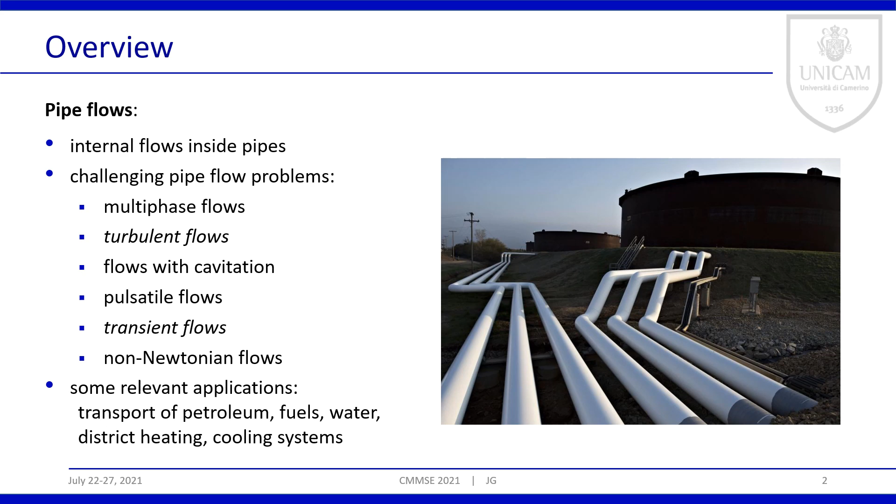And the importance of pipe flows is due to the fact that they are involved in some relevant real-life applications, for example, the transport of petroleum fuels, of district and drinking water, and district heating, or applications such as cooling systems.

The study of pipe flows in our group has started with an application in the geothermal energy field. In this field, I have also discussed my PhD thesis. In particular, geothermal energy is a renewable energy resource that is based on the exploitation of the heat stored in the earth by humankind. And the devices that allow this exploitation are called geothermal exchangers. Such devices consist of a pipe and a carrier fluid that circulates within the pipe. And these exchangers allow the heat transfer between the fluid in the device and the surrounding soil.

And the operating principle is that the temperature in the underground is constant all over the year. And such exchangers can be placed into the soil in different layouts, as you can see in the picture on the left. And also, such devices can have different geometries, and in the picture on the right you can see one possible configuration, which is the U-shaped pipe.

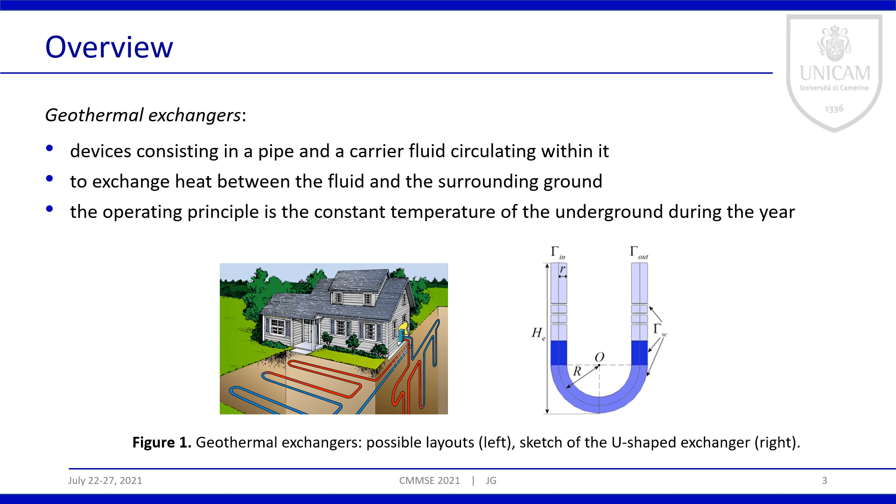Now we focus our interest on a pipe flow in a rectilinear pipe. Here we have the classical formulation of pipe flow problems in terms of fluid dynamics laws. In particular, the first equation is the momentum equation, also called the Navier-Stokes equation, and the second equation is the continuity equation.

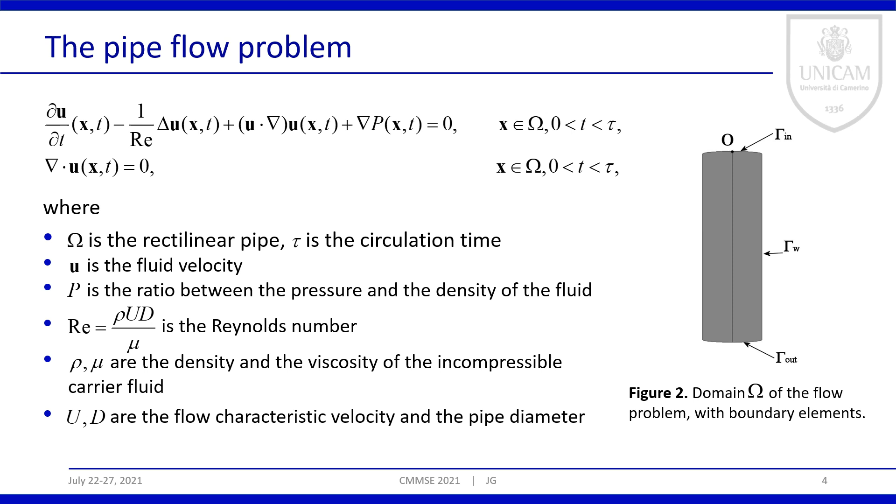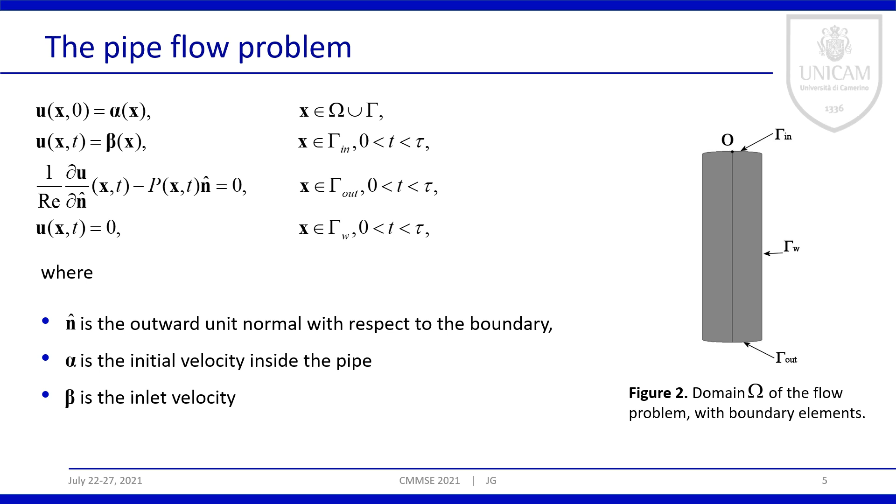Then, the previous equations are endowed with suitable boundary and initial conditions. In particular, the boundary conditions prescribe the velocity field at the boundary, and here the boundary has been denoted by gamma. So we have gamma in for the inlet, gamma out for the outlet, and gamma W for the wall of the pipe. On the other hand, the initial condition prescribes the velocity field at the initial time step.

Now we briefly analyze the approximation of the flow problem that we have defined. I will just show the fundamental steps. The approximation scheme is based on the Galerkin finite element method, so we suppose to discretize our domain omega by means of a tetrahedral mesh, whose nodes consist of the 4 vertices of each tetrahedron and the 6 middle points of its edges. So we define 2 bases of finite elements.

In particular, one basis is made of second-order polynomials that we denote with psi h, and the other basis is made of first-order polynomials that we denote with phi k. And we use the first basis psi h to represent the approximation u tilde of u, so the approximation of the velocity field, while we use the second basis, phi k, to represent the approximation p tilde of p, so the pressure field.

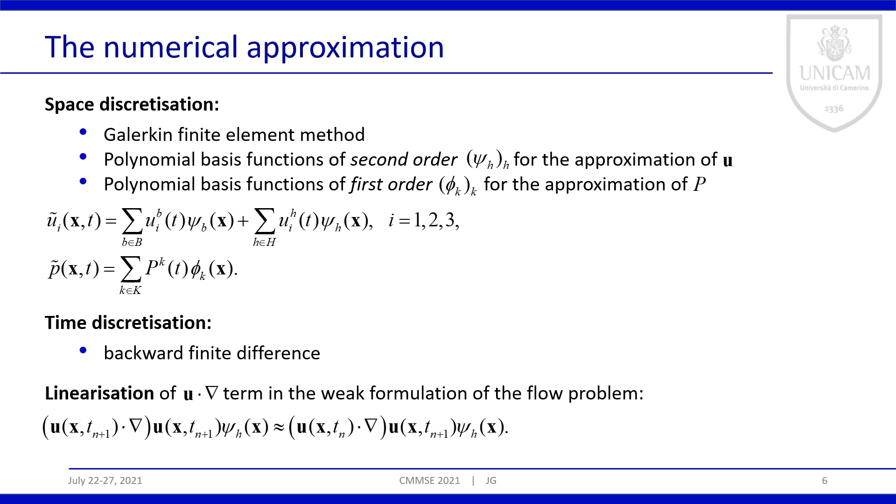Regarding the time discretization, we use the backward finite difference to approximate the time derivative, so we have a procedure that resembles the implicit Euler scheme. Moreover, we have a nonlinear term in the Navier-Stokes equations, which is the advective term. So we linearize this term by means of the linearization technique for Oseen problems. In particular, we substitute into the u-grad operator the velocity with the velocity field evaluated at the previous time step.

We manipulate the equations of the weak formulation of the problem by applying Green's identity and the divergence theorem, and we obtain this final linear system where the coefficient matrix A_n is made of three main diagonal blocks. Each block is made of three matrices. M is the mass matrix, S is the matrix coming from the discretization of the Laplacian term, and N is the matrix coming from the discretization of the advective term. Then we have matrix L, which comes from the pressure contributions.

The coefficient matrix A_n depends on the time step n, since also the matrix N, so the advective term, depends on the time step. Then we have x_n, which is the unknown vector, and it consists of the coefficients of the velocity and the pressure in the finite element representations of velocity and pressure fields. Finally, b_n is the known term.

Moreover, we also apply a fixed point iteration strategy in order to provide a satisfactory refinement of the solution at each time step. All the details about the discretization procedure can be found in the paper reported at the bottom of the page.

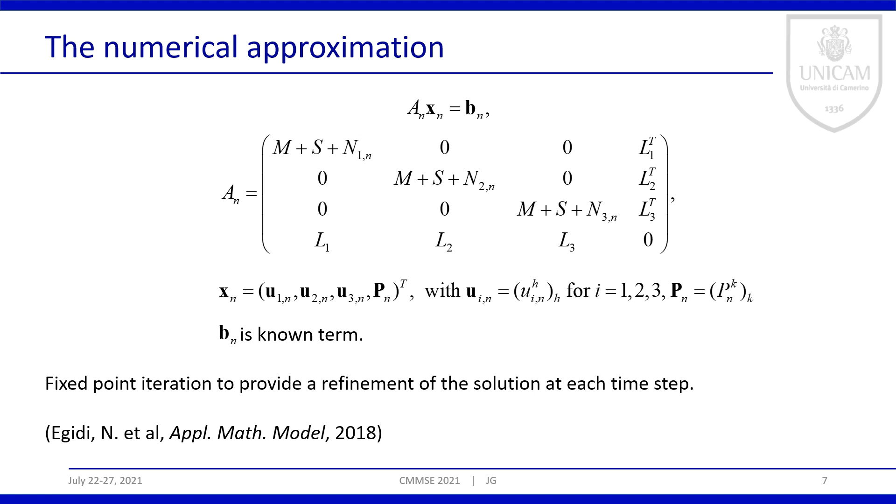The stabilization strategy that we propose is based on Tikhonov regularization. Tikhonov regularization is commonly used for ill-posed problems in the sense of Hadamard, so it works for compact integral operators. And here we have the Tikhonov functional written in coordinates in the most used formulation. And the minimum of this functional gives the solution of the regularized problem.

Now, the idea is to apply the Tikhonov regularization as a stabilization strategy for the computation of the solution of turbulent flows. In fact, turbulence creates a kind of ill-posedness to the flow problem. Why that? Because in turbulent problems, the advective term dominates the diffusive term. And as turbulence increases, Reynolds number increases, and the advective term dominance increases.

And this creates a difficulty in the prescription of boundary conditions. In fact, boundary conditions should be prescribed in accordance to the nature of the new turbulent problem, or better, of the resulting turbulent problem, which is an advective problem. So, where the first order dominates the second order terms.

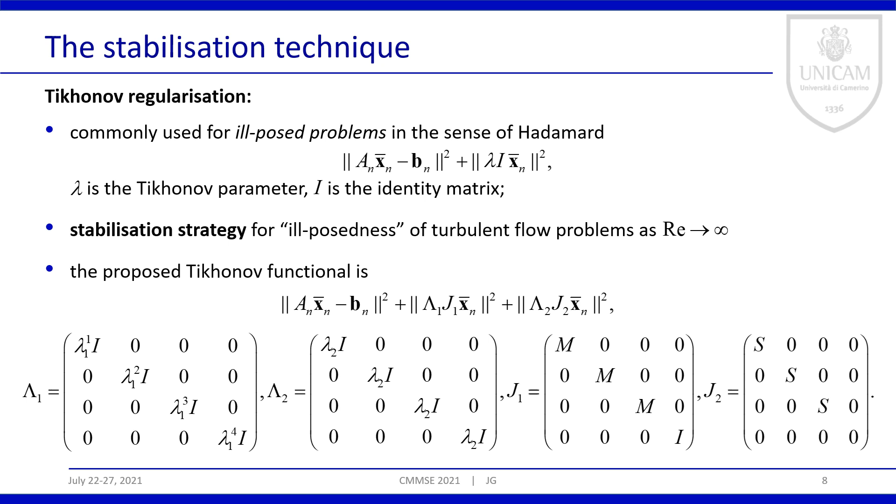Now, just a few observations about the Tikhonov parameters lambda 1 and lambda 2: they must be chosen small enough to obtain a slightly perturbed solution of the normal equations, but also sufficiently large in order to obtain a well-conditioned system. Moreover, we have observed from simulations that once we fix the characteristic velocity of the flow problem and the discretization steps, the Tikhonov parameters are quite stable. So they are quite independent from, for example, geometry variations.

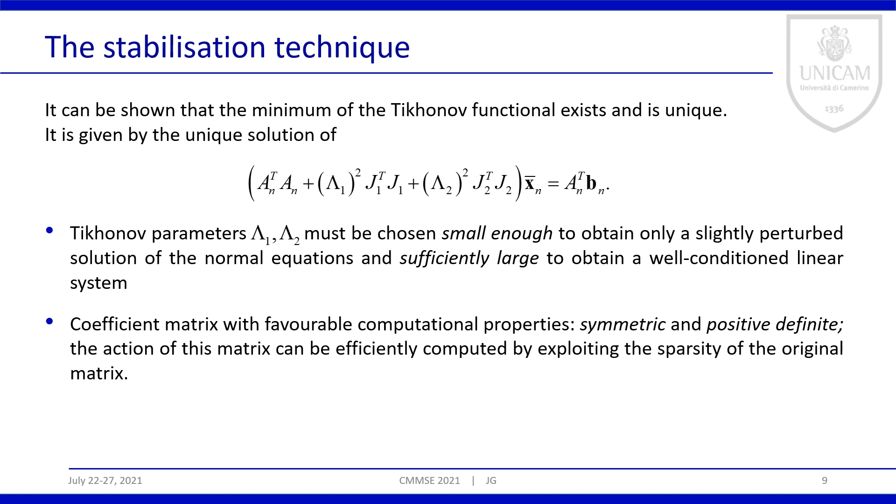Before going into details of the numerical results, I give the characteristics of the domain and some physical parameters. So our domain omega is a rectilinear pipe with radius 0.016 meters and length 0.31 meters. We discretized the domain with a tetrahedral mesh with about 12,000 elements and 3,000 vertices.

The characteristic velocity of the flow is 1 and the Reynolds number is about 40,000, while the initial velocity profile is null and the velocity profile on the inlet face is equal to 0 for the first and second component of the velocity, while the third component is uniform and constant, equal to 1.

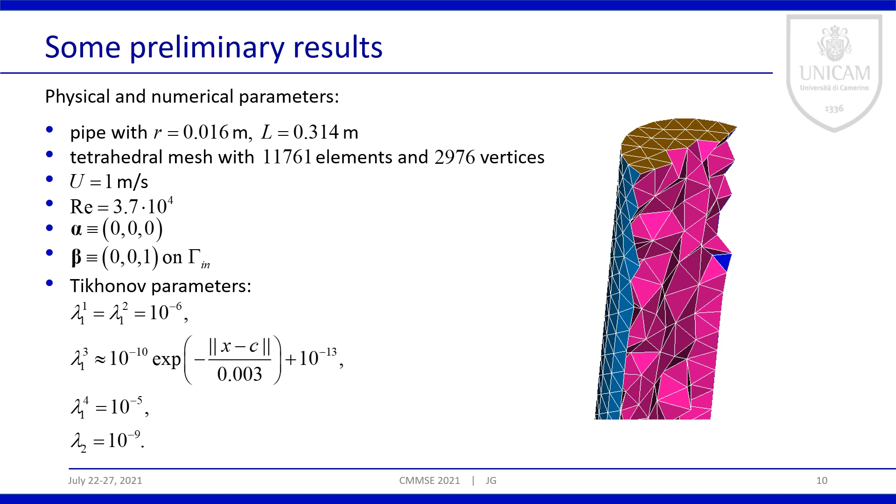Then we have the Tikhonov parameters used, so we have small constant parameters except for lambda 1,3, which is the stabilization parameter for the third velocity component that has an exponential trend.

Now we show the numerical results of the flow problem with the proposed stabilization strategy implemented in a Fortran code. On the left, we have a U-curved pipe, so a different domain, but we would like to show these qualitative results because it is quite interesting to observe the development of turbulence. In fact, the vorticity is clear, and it is also clear the action of the inertia force that pushes the maximum of the profile towards the boundary at the bottom of the U-curve.

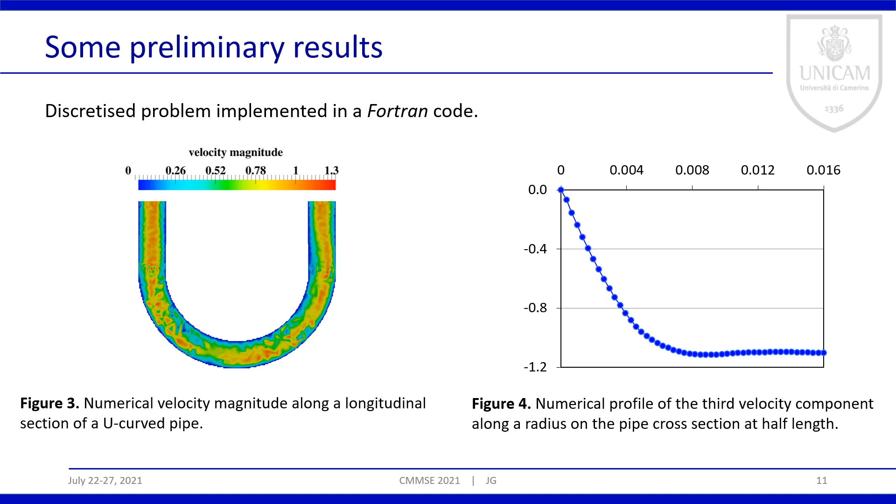On the other hand, on the right, we have a quantitative result, so we have the numerical profile along a cross-section of the rectilinear pipe, so our familiar domain. And here the average turbulence profile is good. It is interesting to compare our results with results obtained with different solving strategies.

So we consider the well-known OpenFOAM CFD software, where our pipe flow problem is modeled by a RANS model. Here the domain is discretized by means of the finite volume approximation, and the solving strategy is based on the PISO algorithm, which is a segregated solver that computes velocity and pressure fields sequentially.

On the right, we have the qualitative results of two different simulations with OpenFOAM. In particular, for the pipe on the left, we have at the inlet face a developed velocity profile along the third velocity component, while for the pipe on the right, we have for the third velocity component at the inlet the usual constant and uniform profile.

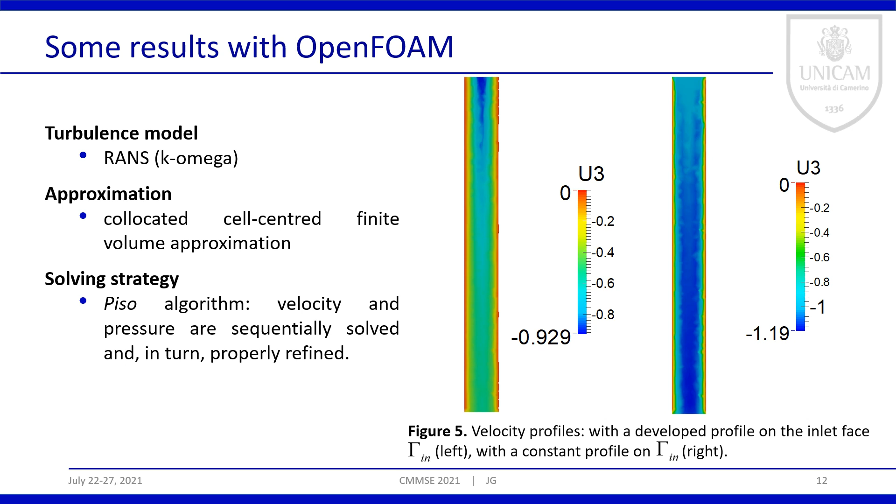Now we can compare our numerical results with the OpenFOAM results. In particular, we will exploit the empirical turbulence profile called 1/7 power law for the third velocity component, which is the axial velocity, so the principal velocity component. In all the three pictures, we have the red lines, which is the empirical profile, while the lines with the circle markers are the numerical results.

In particular, the blue line shows our numerical results with the proposed Tikhonov stabilization strategy, and the green lines are results from OpenFOAM. So, in the picture on the left, our results, we have a very good agreement between the empirical turbulent profile and the average turbulent profile that we obtain with our stabilization strategy.

In the picture on the right, again, we have a good agreement between the OpenFOAM results and the empirical turbulent profile. Perhaps these results are a bit worse at the beginning, so near the zero. While at the center, OpenFOAM doesn't perform well. In fact, in this case, it starts with an inlet profile, which is a parabolic developed profile, and then OpenFOAM is not able to develop a turbulent profile. In fact, the green line is quite far from the expected turbulent profile.

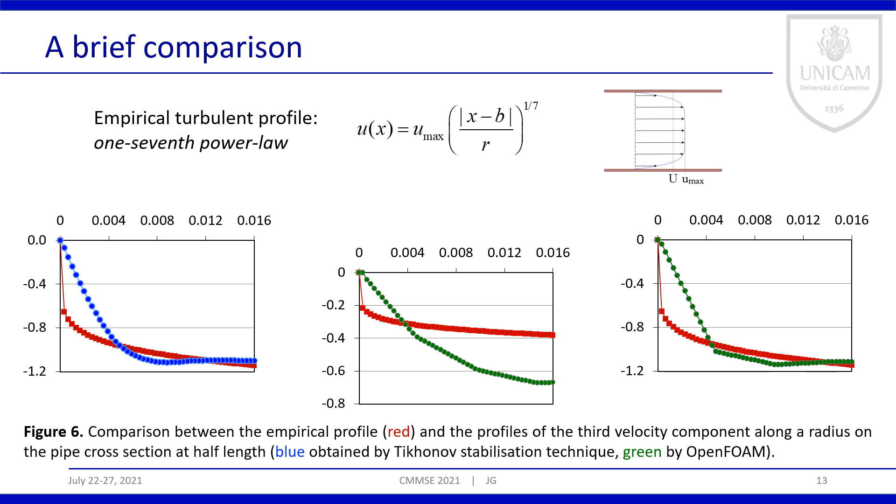In conclusion, I have shown preliminary results on a stabilization strategy for turbulent pipe flows based on Tikhonov regularization. But we would like to go deeper in the investigation of the effectiveness of the proposed method on pipe flows, both from the analytical and the numerical point of view. Besides, we would like to compare our method with the artificial viscosity methods.

In fact, the artificial viscosity methods are applied to model the small scales in turbulence or shock problems, since these small scales cannot be resolved by a finite dimension discretized problem. So, the strategy of artificial viscosity methods consists in adding a term containing the viscosity, and this acts as a stabilization strategy. And the added term is called artificial viscosity.

But we would like to investigate the possible correlation between our method and the artificial viscosity methods, since also in our method the matrix lambda 2 could be seen as a kind of artificial viscosity. Finally, we would also like to extend our method to external flow problems.